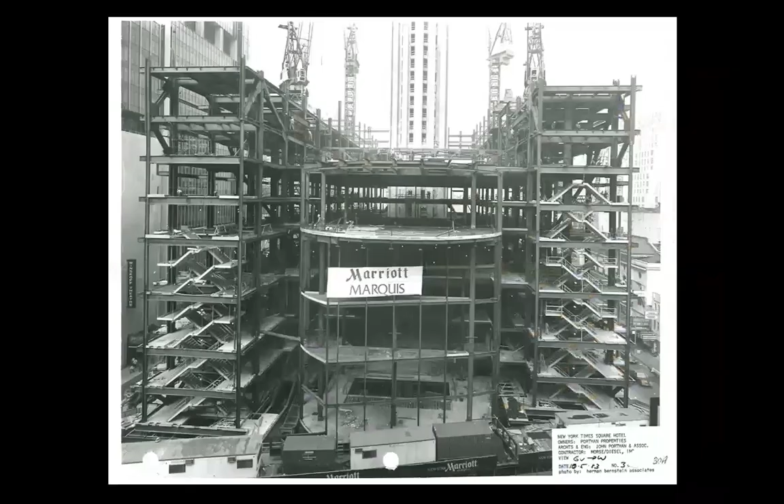And I'm not jealous—I think a hotel could be more modest, even in Manhattan. But still, that interior space, that vertical space, that atrium is interesting, and that's what he brought to this program, the hotel.

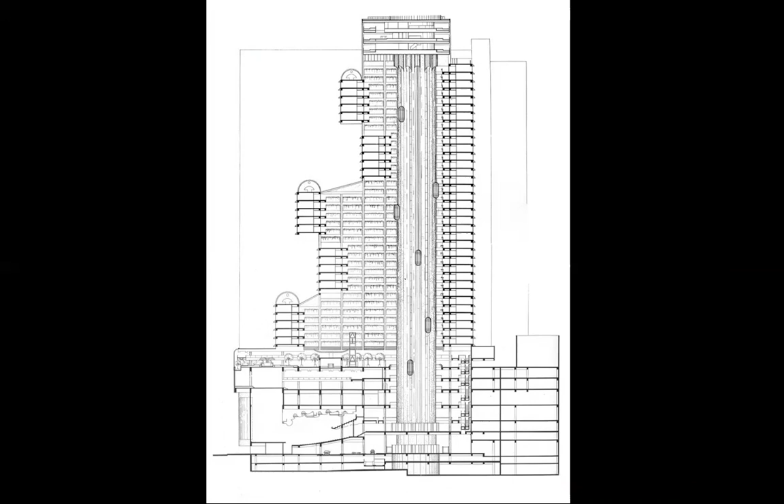So there is, in my opinion, a non-critical exuberance here that—well, I understand sometimes exuberance should not be critical, in fact maybe often—but here is an exuberance that I find a little bit close to Walt Disney and Las Vegas. In fact, his architecture was named Disney architecture for adults, a little bit malicious, this statement. But he has force—I mean, look at the building. And again, he built it for himself. I mean, it is incredible.

He was obviously very skilled at real estate. But what does it mean to be skilled at real estate? To be able to make transactions that are very lucrative. In essence, it's not about art, it's about money and making money. But he was a unique case, where indeed he was the Medici and Leonardo, as he put it, or we could have said another artist or architect from the Renaissance, equally great.

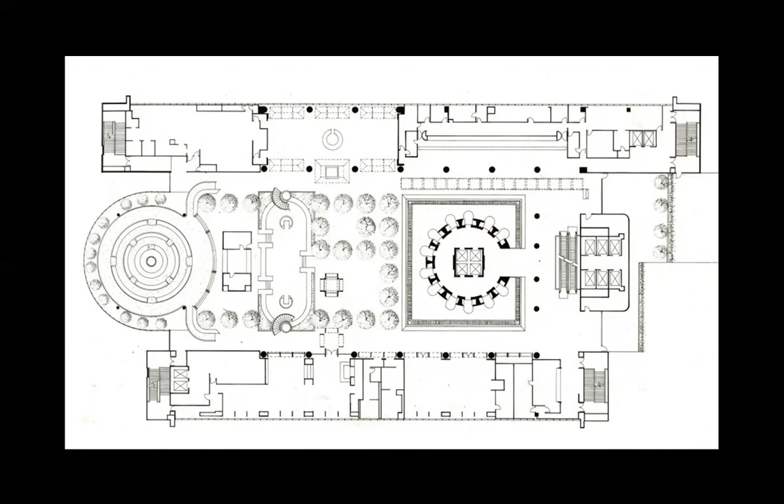So this is the plan, yeah, it's a triumphalist architecture. And the only question I have is, do we need triumphalism in this field?

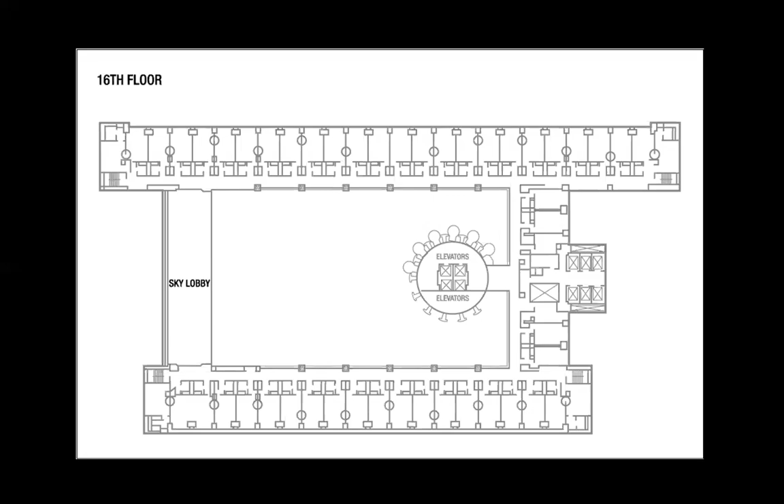I don't know. Anyway, the climate change is here with us and probably to remain, and so is the rising level of the seas, and so is the crisis with nature, the abuses of nature.

But again, if I look at this abstracted picture, I do see a certain virility in the good sense of the word, and power. But again, I have to say this little word, 'but', because I think a truly great work is one that combines the spirit of geometry or will or willfulness with the spirit of fineness or grace. If you just have will, you have force, but is it enough? It is not. You also have to have what the word grace means, and that means a certain sensitivity that knows how to question this display of excessive power, which, because of its function, also is.

I mean, a pyramid should be as it is, but this is a hotel, for God's sake. The Atlanta Marriott Marquis Hotel. This is a hotel that made him famous.

And indeed, these vertical spaces are impressive, and they are not simplistic. You see, the geometry is at times contorted, and so he took risks. And look, this is the interior space. It's incredible. He did it. This is a Portman hotel.

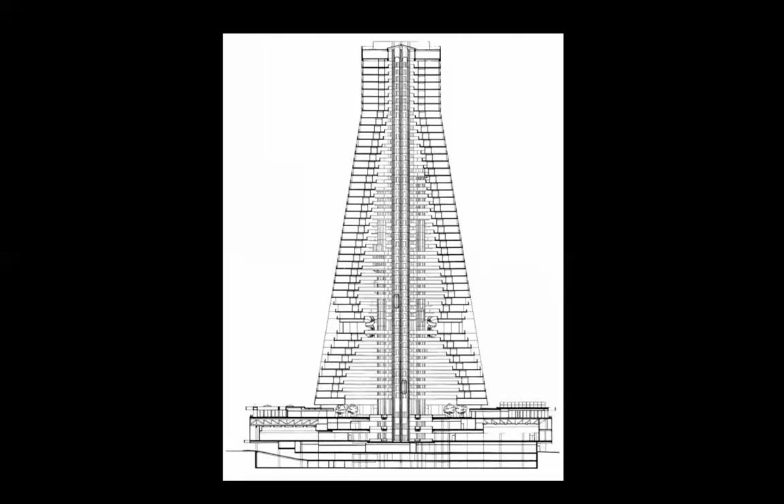He must have felt very secure financially to do something like this. Can you imagine a so-called regular architect, doesn't matter how talented or audacious, drawing something like this when he didn't have the money for it? So this is a pharaonic enterprise done by a man who had probably pharaonic amounts of money, or he was able to bring it to the project in some form. No, he was rich, but I don't know. It worked. For him, it worked.

And you see, the building does have—I actually like this building more than the other one, with its more reticent geometry, but still there is strength. This one is also okay, I would say, but still, when I think that it's the Triumphalist Hotel, I get a little bit turned off. I would have liked it to be something else.

When Kenzo Tange, for example, built the St. Mary Cathedral in Tokyo, which is much smaller, and he used exposed concrete and so on, it worked because it was a cathedral. That cathedral built by Tange was much more modest than this hotel. I mean, what is it celebrating? This hotel really? It is celebrating killing one's time.

But when you think about Philip Johnson saying he prefers to build another skyscraper than to lay on the beach on a chaise lounge or whatever, then you wonder what are the great virtues of these giant structures built for tourism. And now, from the perspective of climate change, we know very well the consequences of this globalist traveling. Of course, we benefited from it, but at the expense of weakening the level of ozone, and a lot of pollution and problems with the climate.

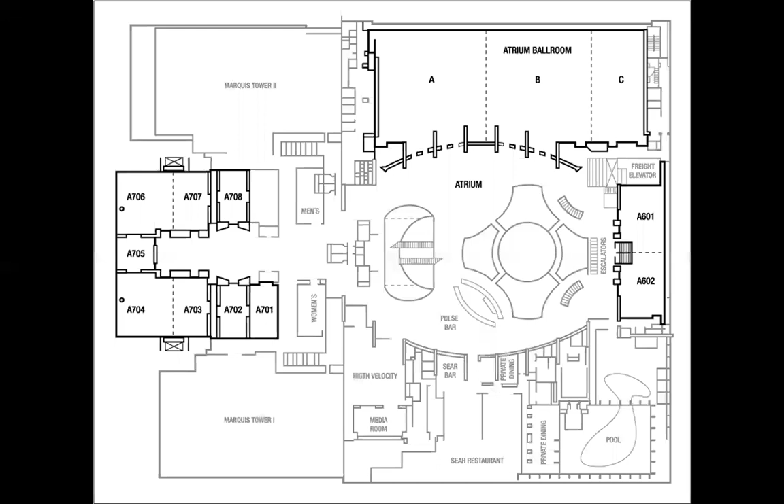What is strange, perhaps, is that I didn't see too many pictures with people here. These structures, in order to function, needed a lot of tourists, and probably they did have them. But most pictures I found were devoid of people—those very people he mentioned as being the main goal, the raison d'etre of architecture.

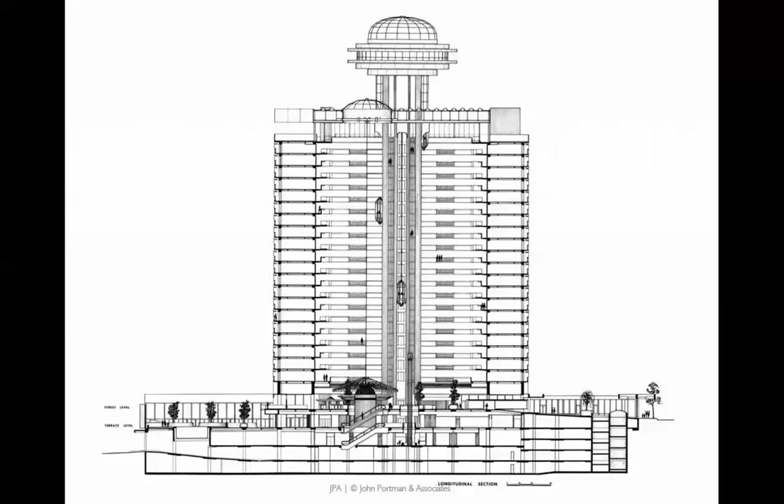But I appreciate that atrium, yes, that vertical cave. That I do. I also appreciate the facade. The elevation here is simple, but it has a rigor, and it's balanced. I think it's rather okay.

But again, he comes up with these things that some people might call futuristic or neo-futuristic. To me, they are closer to science fiction and not truly the noblest kind of architecture, in my opinion. Now, what is truly positive here is the space itself, not the shape, or the elevators. I still think he could have used less so-called interesting elevators—rectangular elevators, something. But I guess he wanted so-called accents of visual interest. I find them vulgar.

So this was from 1967. What you see here is from 1967. That's how it looked like. The same hotel, but this picture is from 1967.

Consume, consume, consume. Have a good time. Now my question is: why are we on this earth to fool around, to consume, consume, consume, and abuse the earth, abuse the air, abuse everything, just to have fun, fun, fun? If this is what Mr. Portman means by life, I don't know. I like to think that maybe life should have other reasons to be.

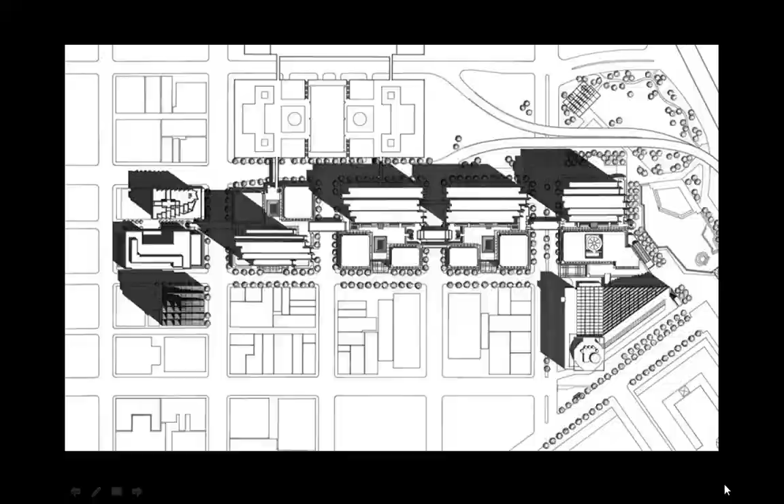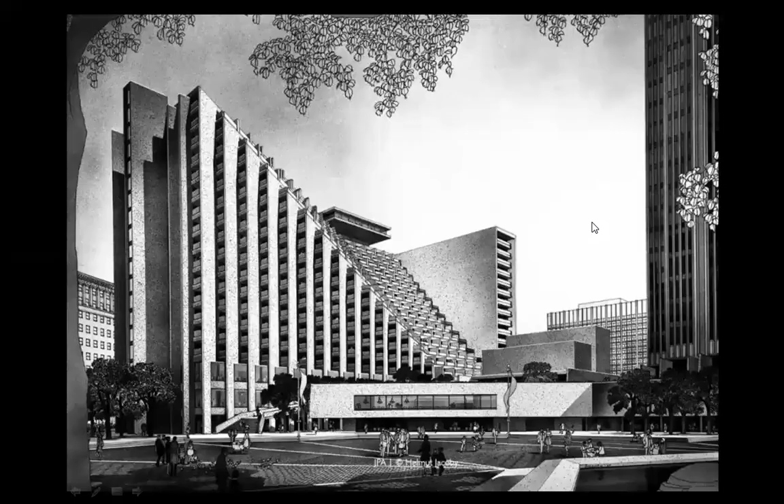It is acceptable at a time when human beings thought they were the shepherds of everything on earth, and that they could do anything. So there was a certain optimism, which became inflated over time. But still, this building is more interesting than most of the buildings around it. So in Atlanta, even Koolhaas wrote about it—there was some kind of urban experiment that took place, and John Portman was heavily involved with what was happening in Atlanta.

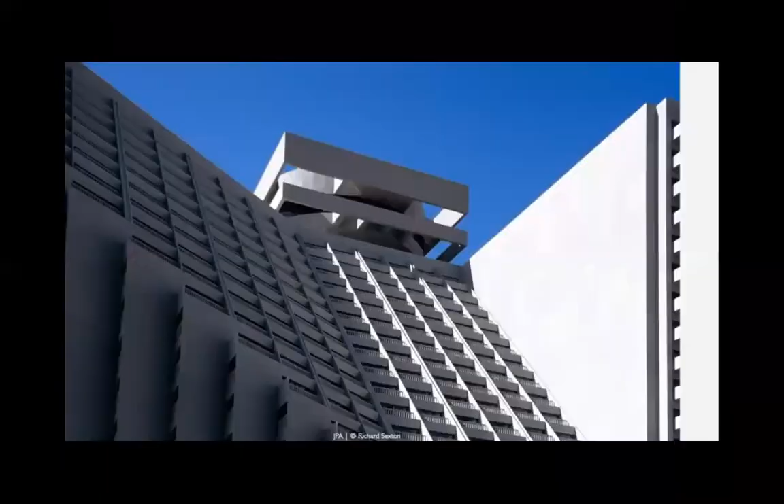I imagine in the case of a hotel, so concerned with making money, it was not very easy to make an architecture that was, if I am to use such language, excessively pure. So levels of vulgarity were probably unavoidable. But still, here we have these diagonals of audacity, which must be admired, I think.

Now, with such a name, I think the name also helps. If your name is John Portman, somehow the name itself has a certain power, and it shows also in the buildings he built. Now, other people might have been called John Portman or something similar and not build anything. Well, he did.

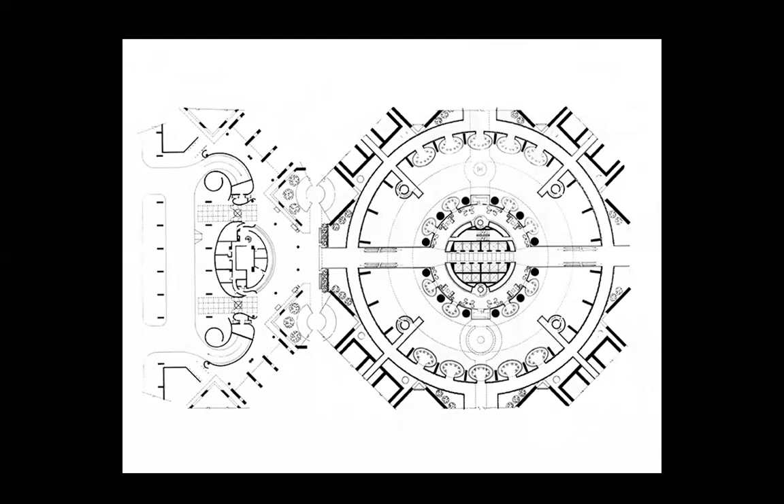Renaissance Center, atrium at street level, courtesy of John Portman and Associates. This is the plan. It's perfectly symmetrical, and there's some interest, because there are some curves used and the rotations at 45 degrees.

And yes, but all for the glory of what? To have fun, to have a good time. This is a rendering, but the building was built kind of like this.

And here are some people having fun in Detroit, although Detroit shouldn't really be the city to have fun in. For a number of years, it was ravished by the car manufacturing being exported to China.

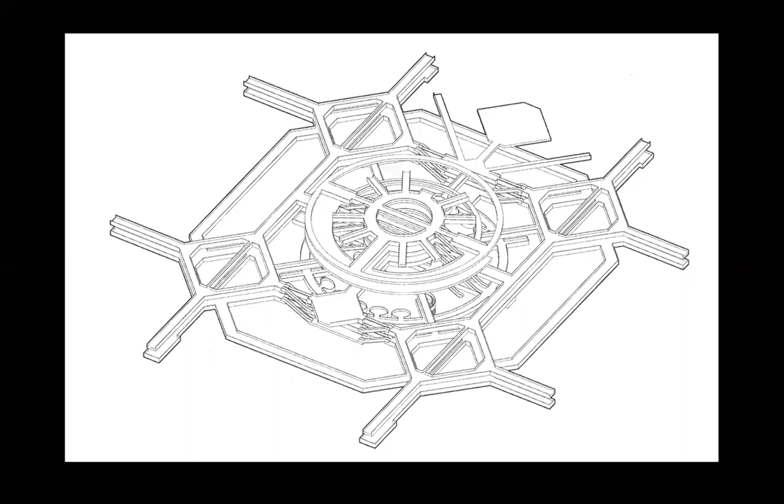Renaissance Center, the diagram of interior walkways. Renaissance Center, the site plan. This is his architecture.

It is such a difference between Portman and Kahn. Louis Kahn also worked with rotations, with symmetries. But in the case of Louis Kahn, well, it's true, Kahn was a very different kind of man, because he was born very poor in Estonia. He crossed the ocean, and his face was ravished by a fire accident where he became disfigured.

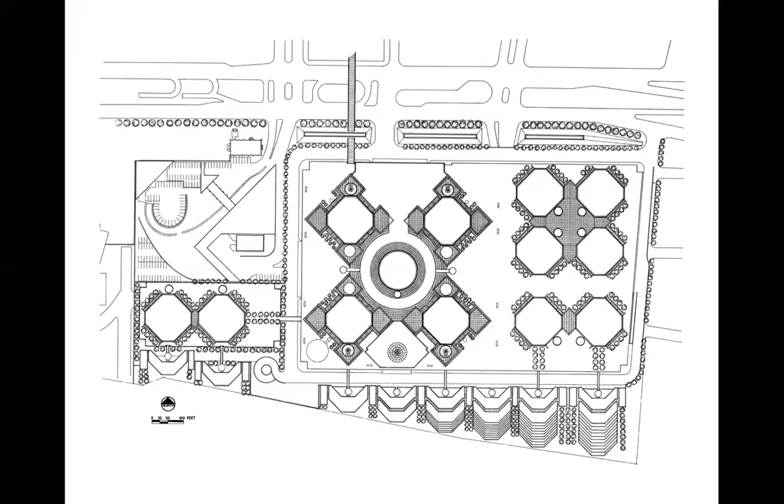And as his friend Vincent Scully, the important historian and theorist of architecture, said, in the case of Louis Kahn there was the meeting between laser light and candle light. What does this mean? It means the light of technology, but also the humblest form of light, which is the candle. Well, we cannot say the same thing about Portman. In the case of Portman, I don't know if you see the laser, but you certainly do not see the candle.

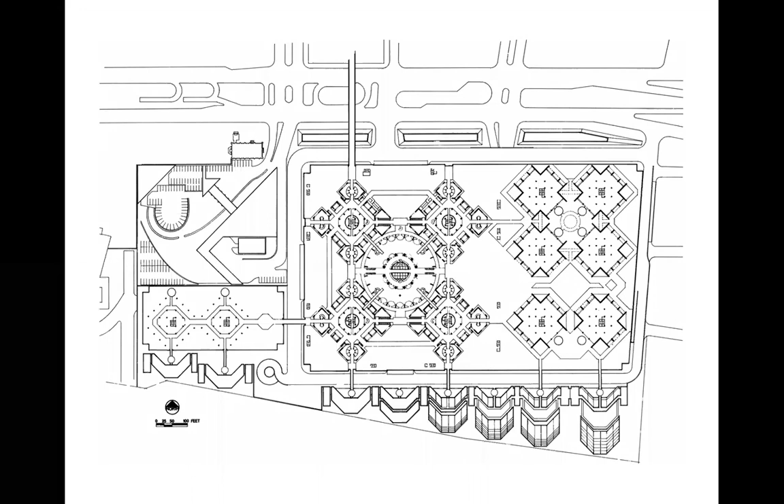Another, the street level plan, and the intermediate level of the same so-called Renaissance Center. Strangely, the Renaissance Center was built before, when there was actually a great need for a Renaissance, because Detroit fell apart dramatically - and the podium level, and so on.

Yes, triumphalist architecture for the city, which was famous for its automobile industry. You know, the T-Ford model that began the disaster called taking over the world by the car, which also provoked the war in Iraq and many other, who knows what, because of the obsession with gas.

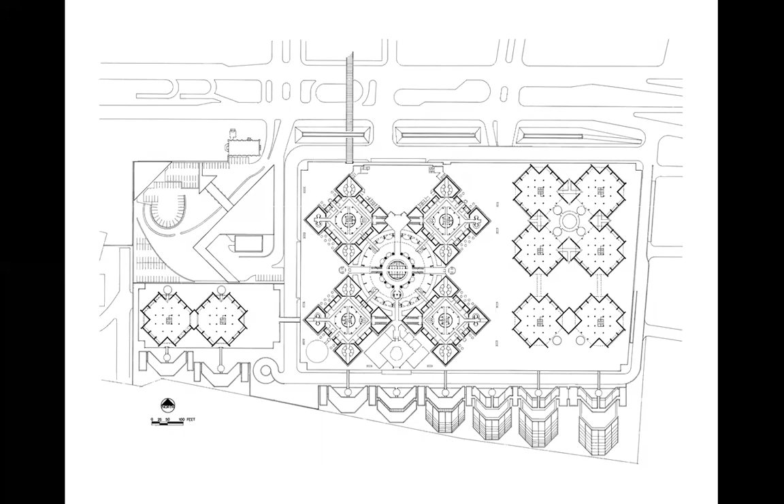We might create some electrical cars, but we still ravage the earth to get the oil, to make the gas the cars use. So the Renaissance was, I would say, excessively optimistic. I mean, the Renaissance in Detroit.

Thank you. Now I go to an Italian woman of Italian origin, well, she wasn't a French architect, but of Italian origin, an interesting architect, and great. I have seen two buildings by her, but actually the buildings were not originally by her, she transformed them for a different function. One was the station in Paris that became Musée d'Orsay, and she was the architect who did the interior transformation of that railway station. Then she also did the refurbishment, the transformation of the museum in Barcelona, Museum of Catalan Art, I think it's called. Both are great, I have been in both buildings, and she did a marvelous job.